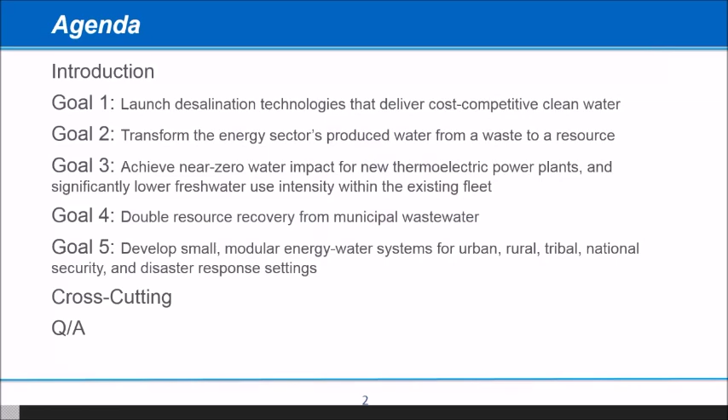Next slide, please. The Water Security Grand Challenge is a White House-initiated, DOE-led effort using a coordinated suite of prize competitions, early-stage R&D, and other programs to make rapid progress, advancing transformational technology and innovation to meet the global need for safe, secure, and affordable water. And by 2030, we would like to launch desalination technologies that deliver cost-competitive clean water.

Number 2, transform the energy sector's produced water from a waste to a resource. Number 3, achieve near-zero water impact for thermoelectric power plants and significantly lower freshwater use intensity within existing fleets. Number 4, double resource recovery from municipal wastewater. And finally, develop small modular energy water systems for urban, rural, tribal, national security, and disaster response settings.

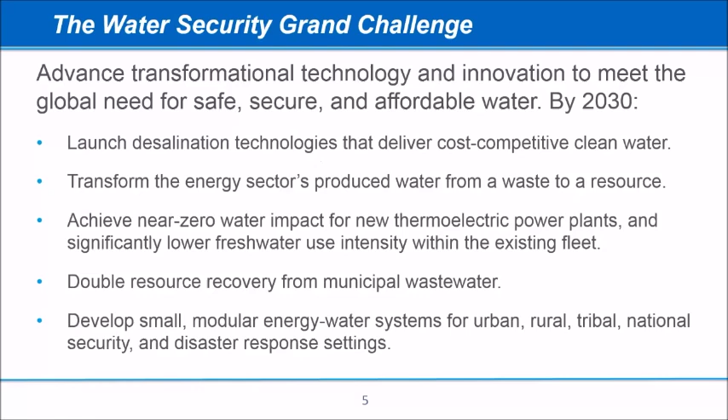I got a little ahead of myself, but I wanted to give a little context on how this came about. This was launched in October of 2018 by Secretary Rick Perry, and several hours after the launch, we held a workshop at DOE's National Renewable Energy Laboratory, and we gathered input from external experts to inform the development of prize competitions that DOE could launch to support the Grand Challenge. Next slide, please.

After the workshop, DOE recruited interagency participants, agencies including EPA, DOD, DOI, USDA, and FEMA, to join cross-functional teams aligned with each of the Grand Challenge goals. Each team is identifying and pursuing high-impact partnerships, assembling and analyzing relevant data, coordinating and informing future R&D and related activities, and developing new prize proposals. So the thought is that each team would have at least one prize proposal.

Just to give a little bit more background, the executive lead on this is Assistant Secretary Daniel Simmons, who leads the Office of Energy Efficiency and Renewable Energy. Next slide, please.

I just want to give you an idea of what we're looking to accomplish with this webinar series. We're looking to build community surrounding the Water Security Grand Challenge and draw in additional partners and competitors to help meet its goals. To provide a platform to share knowledge, information, and ideas among DOE, its partners, leading innovators, and the public. And finally, to provide a means to gather information on barriers and opportunities to meet Water Security Grand Challenge goals that can inform future prize ideas. I can't stress that enough. We are here to share information, but we would like your input as well.

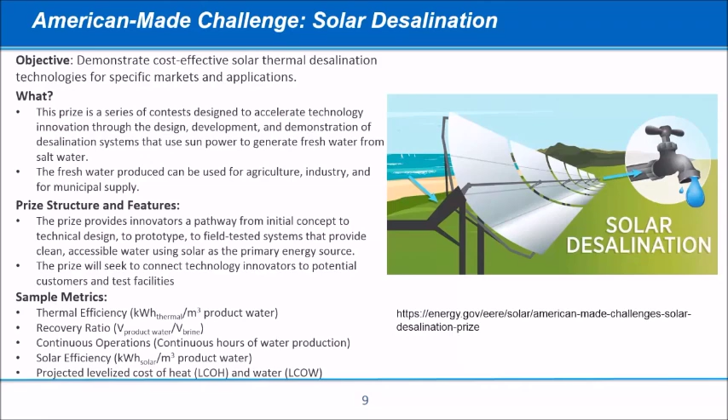With that, I'd like to introduce the presenter for the next goal, Elena Melchert from the Office of Fossil Energy, who will discuss Goal 2. Hello. I'm Division Director for Upstream Oil and Gas Research in the Office of Fossil Energy in the Office of Oil and Gas here at the Department of Energy.

Goal number 2 focuses on transforming produced water from a waste to a resource. And produced water is that water that is produced with oil and gas during normal operations, and also that water that's produced during the normal operations of uranium mining and extraction. Can I have the next slide, please? About 45% of oil and gas produced water is used within the oil fields, which leaves about 55% available to use outside of the oil and gas sector.

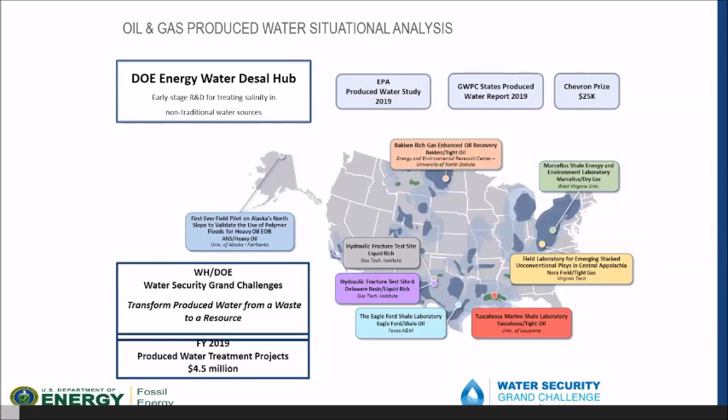There we go. We've been involved in produced water treatment for many years, and over the recent past, we've invested in about 60 projects worth over $100 million. And this research was conducted in partnership with the private sector. This is an oil and gas operations cost of doing business, dealing with that produced water. It comes up with the oil and the gas, and so you can't actually take oil or gas to market without removing that water. And as I said earlier, 45% of that water is used in oil and gas sector operations, leaving that 55% available for other uses.

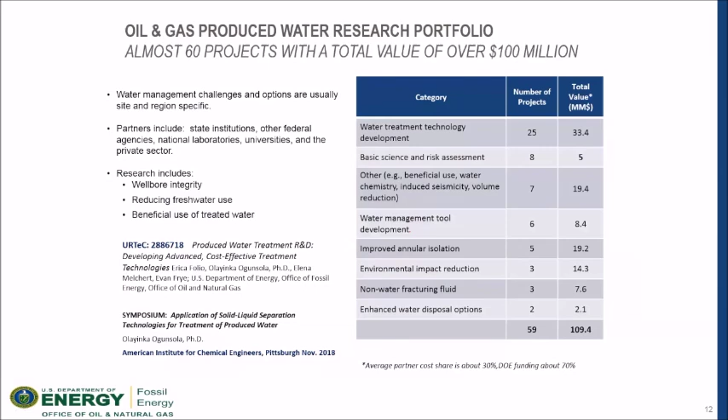Let's see, where am I here? Can we have the next slide, please?

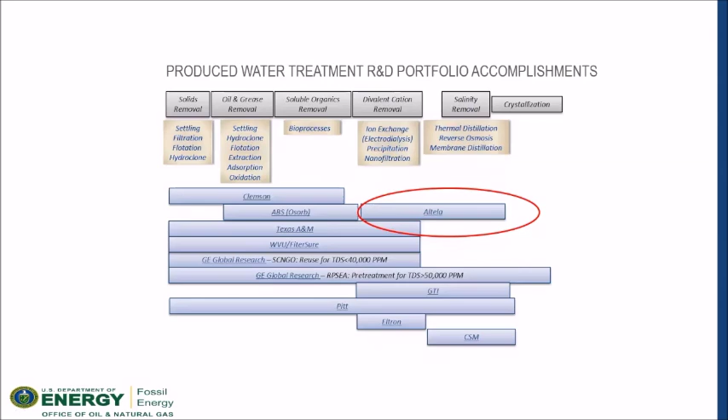So Goal 2 is being developed in partnership with the U.S. Geological Survey, USGS, and the EPA, Environmental Protection Agency. The USGS has the largest database of waters in the country, and EPA is the lead regulator for water quality. Together we hope to develop this Goal 2 in a way that advances all of our needs and uses all of our core strengths.

The bottom line is that to transform produced water from a waste to a resource is to perhaps reduce the cost to where it becomes a revenue stream perhaps, and a large volume source of clean water, offsetting the use of fresh water. And to do that would be the grand challenge of connecting supply and demand. So that's sort of the current state of goal number 2.

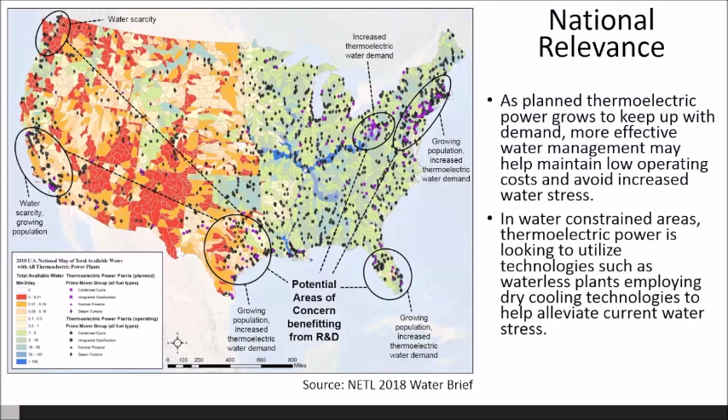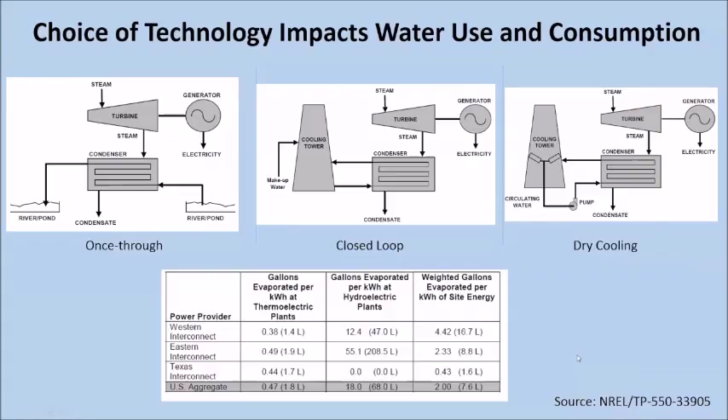So really, the point of this slide is to emphasize that the cooling system employed at the plant is often a greater determinant of water usage than the particular generating technology itself, both in terms of water consumption and water withdrawal. So if we go to the next slide, you'll see graphically that once through cooling, which is the second column, typically withdraws 10 to 100 times more water per unit of electric generation than cooling tower technologies, which is the first column. You'll note that across the bottom, it's hard to read, but there's a variety of electric generating technologies, as I referenced on the previous slide.

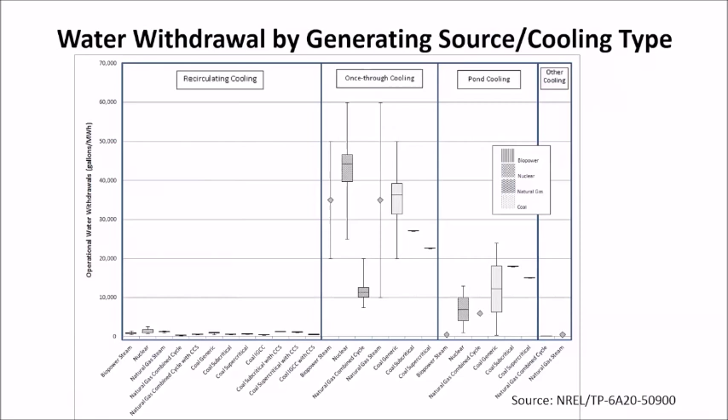So that slide was looking at withdrawal, again, once through having a very high withdrawal, 10 to 100 times. On this slide, you see that cooling tower technologies actually consume at least twice as much water as once through cooling. And then in the fourth column, you see the water consumption for dry cooling is actually an order of magnitude less than for recirculating cooling. So depending on whether you're trying to tackle the water consumption or the water withdrawal problem, there are different opportunity spaces.

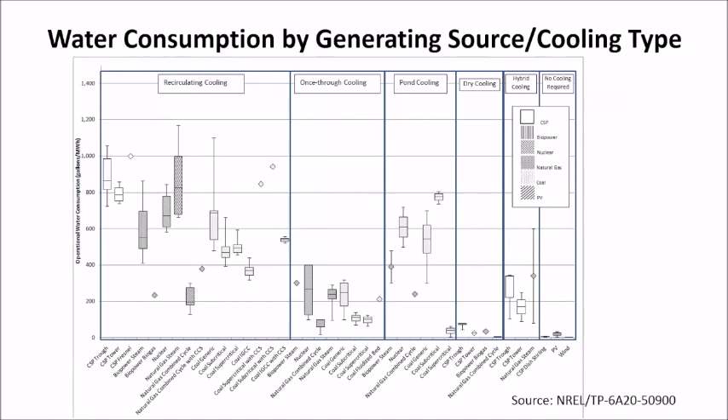So next slide. Coming out of the October 25th workshop that Kevin referenced, there's one promising concept, and that's something focused on new cooling technologies. Cooling, as I've mentioned, is the major water draw within the power sector. There are technologies that exist to reduce water in cooling applications, but they typically come with an energy or cost penalty and haven't been demonstrated at scale. So we look at it as an opportunity to build upon recent investments by DOE programs to help reduce the penalties associated with these new technologies.

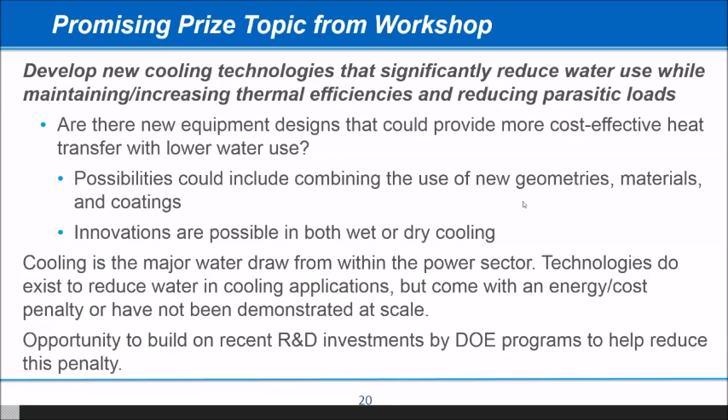So as we inform our prize definition for our goal, it's most likely that we want to look at these recent activities and figure out what the best opportunity space is. We will most likely use an RFI to inform our prize definition, one that would take a form similar to what's currently on the street from the AMO office, which is actually in the next topic area.

So with that, I'll introduce our next speaker, John Smeagol. All right, thank you very much. My name is John Smeagol, and I'm the team lead on the resource recovery goal. I also work for the Advanced Manufacturing Office.

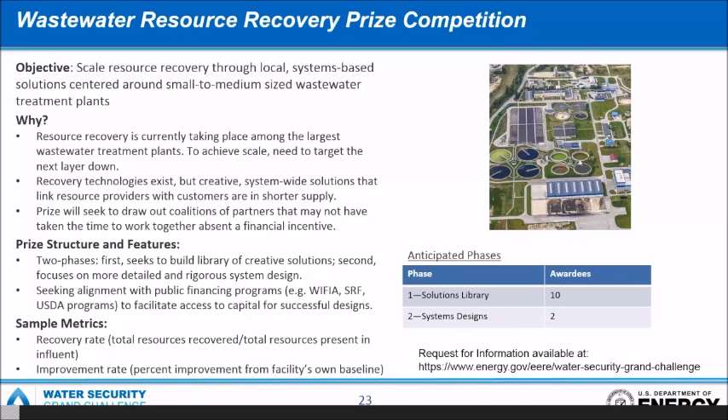We're trying to solicit stakeholder input on the overall prize concept, whether or not there are analogs. We're looking at resource recoveries, what sort of state and local policies are effective, what are potential barriers, which stakeholders are critical. We're also looking at how we should design the prize, the actual phases, the incentive levels, whether or not we're using an appropriate cutoff for small and medium sized. And lastly, we're looking at criteria and metrics and what are the most appropriate ones to use that will ultimately result in a well-structured and effective prize competition.

And at this point, I'd like to turn it over to John Carmack, who will discuss goal number 5. Thanks, John. This is John Carmack. I have the pleasure of presenting Goal 5, develop small modular energy water systems for urban, rural, tribal, national security, and disaster response settings. With that broad class of potential applications and challenges, it's become really an inspiring goal with many potential beneficial outcomes.

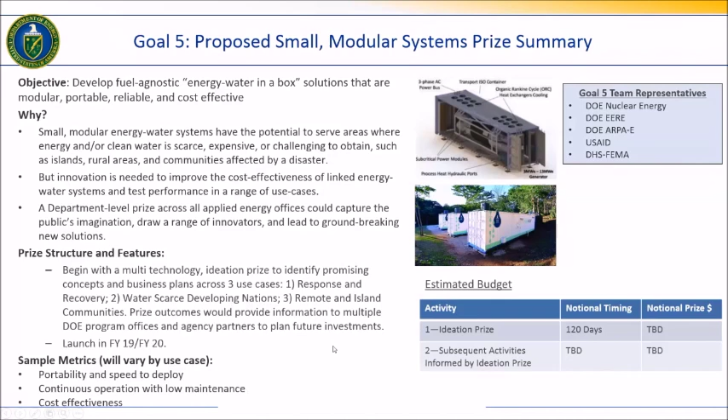Okay, thank you. So I'm Melissa Klembara. I'm also from the Advanced Manufacturing Office, and I'm here to talk to you today about the Energy Water Desalination Hub. Next slide, thanks. So about 2 weeks ago on September 23rd, the Secretary of Energy announced the selected award for the Energy Water Desalination Hub, which is a $100 million early stage R&D consortia.

It's really meant to be sort of like a mini Manhattan project of getting together lead scientists from across industry, university, national labs, nonprofits, to really focus in on developing new technologies for bringing down the energy intensity and costs for desalination technologies. We selected the National Alliance for Water Innovations, which is led by Lawrence Berkeley National Lab, and they have 35 main members with over 180 other participating organizations.

And we're also looking for more participants. As Kevin suggested earlier, we're trying to build out this community, and so we really want folks who are interested in joining the hub and being part of this research effort to go to the website I have identified there, nawihub.org, and you can learn about how to become a member.